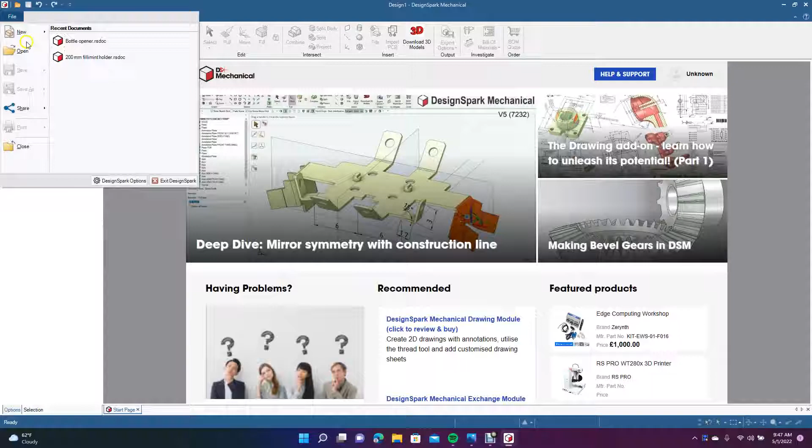Design. We're going to come back up to File, go down to DesignSpark Options, navigate over to Units. We want this to be in metric, so we'll go ahead and change that to metric. Then we're going to go ahead and change that to plan view. Okay, we're going to go ahead and create a line out here. So just click anywhere. We're going to drag down.

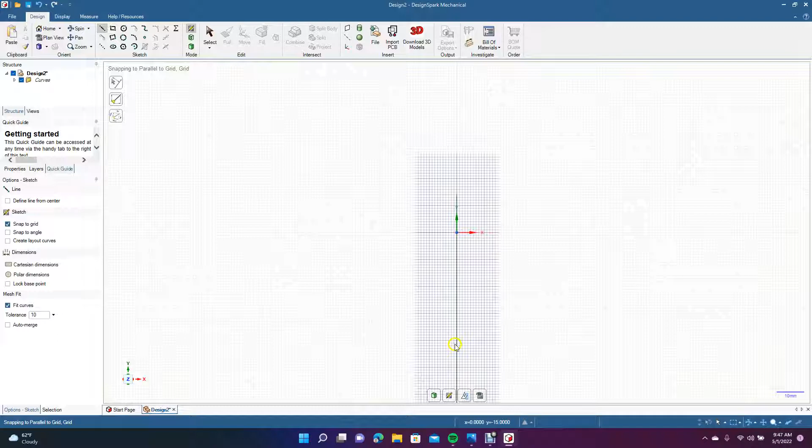We're going to type in 130 millimeters. That's how long the grip should be. Then we want the grip to be 33 millimeters. So we're going to offset this line 16.5. So we'll get our offset curve. We'll type in 16.5. Okay, and then we want to add some thickness to the grip, so we're going to go ahead and get our offset again, and then click on over and offset that, let's say 5 millimeters.

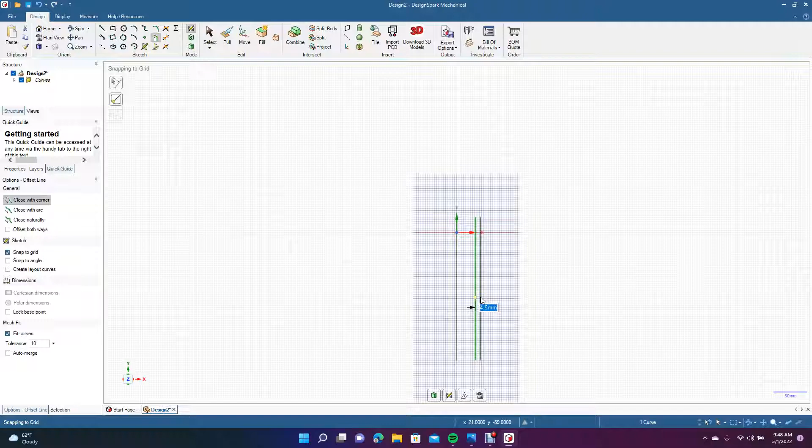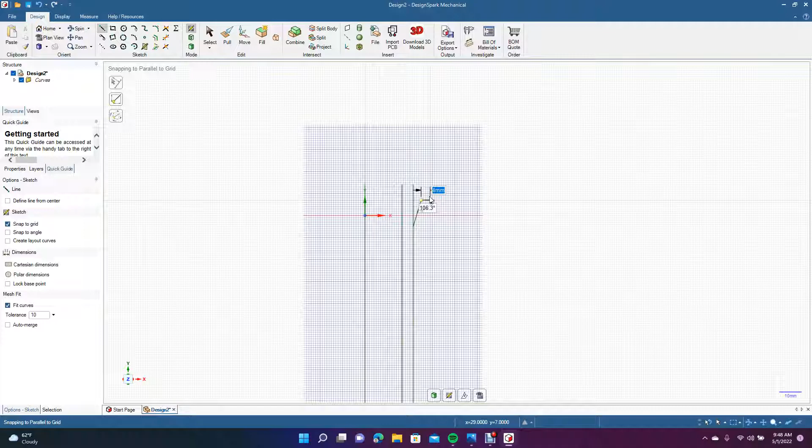Okay, let's Control plus to zoom in. Let's pan up. Okay, we're going to go ahead and get the line tool. We're going to put a little bit of a stopping point there for the grip. Okay. Let's go ahead and get the trim away tool. This is right there. Trim away that piece. Go ahead and up here to the create corner. We're going to extend that over. Now Control minus.

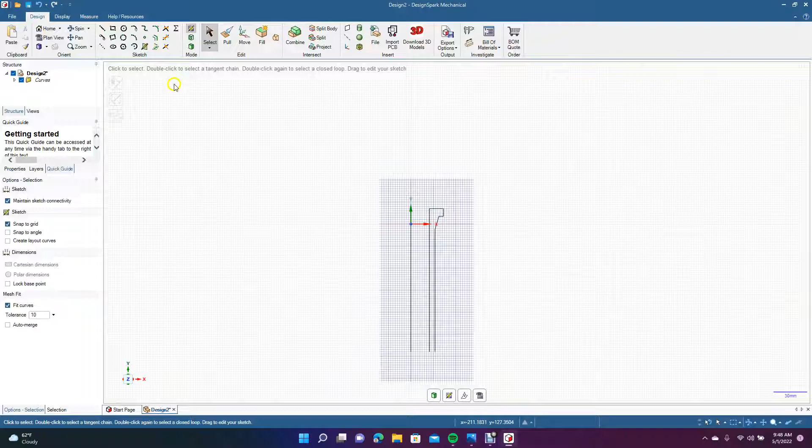We're going to do the same thing to the bottom. So let's go ahead and pan up. Just Control plus. Pan over to the right, grab our line tool. Similar situation here. Okay, let's get our trim away, which is right there, or T on the keyboard. Let's go up here to create corner.

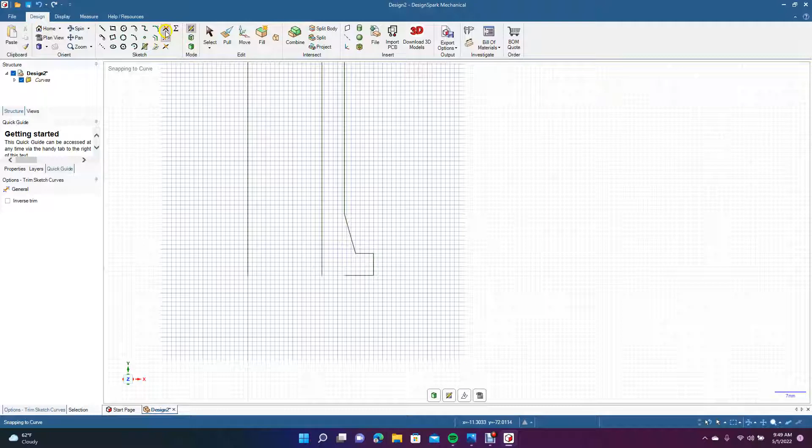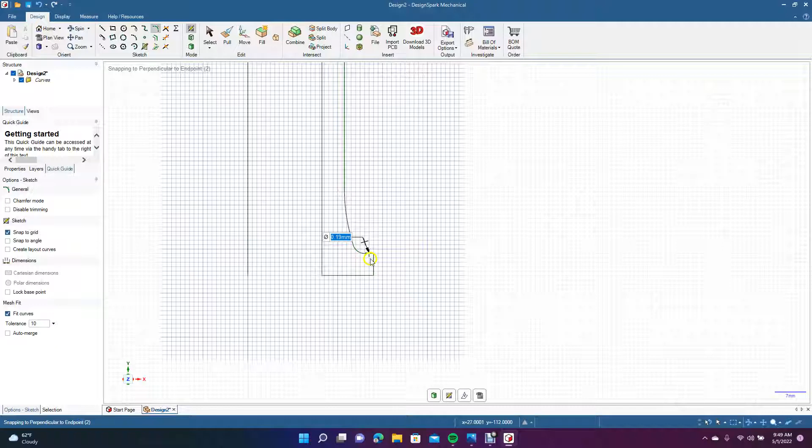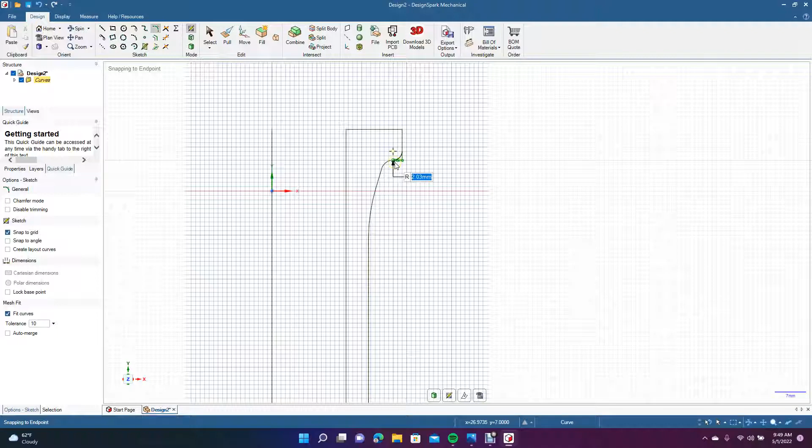Okay, let's put some fillets on this. So we're going to go ahead and create rounded corner, grab that tool. Let's go from here to here. Okay, let's pan this down. Let's do the same up top here. Let's click there. Click 2 spots there to round, and then 2 more spots here, from here to there. Okay. Now we're going to Control minus.

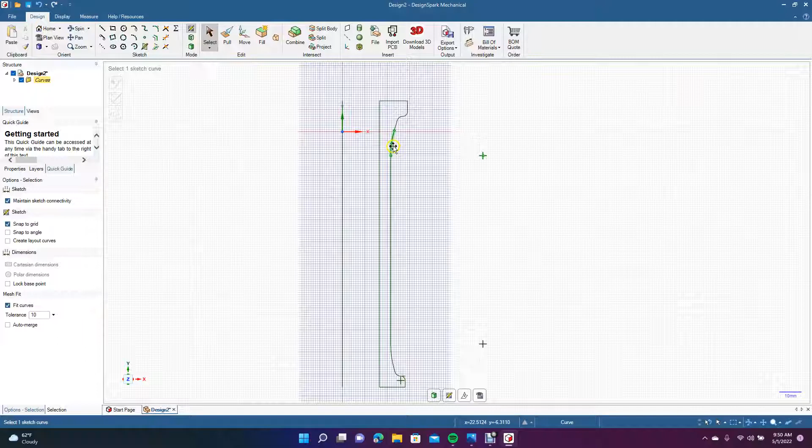I want to put a little bit of a rounded corner, a little bit of an arc in here. So we want this to give some padding for your hand. So we're going to go ahead and I'm going to get rid of these. Delete. I'm going to get the 3-point arc. I'm going to go from there to there. And I want to put a little bit of a kind of a bow in there. Okay.

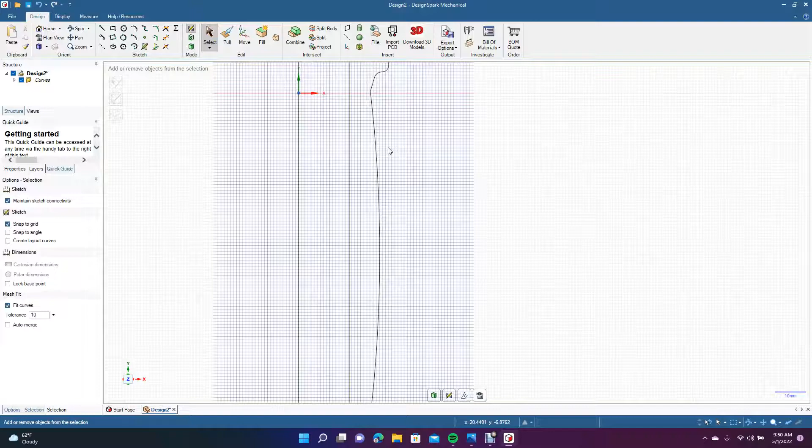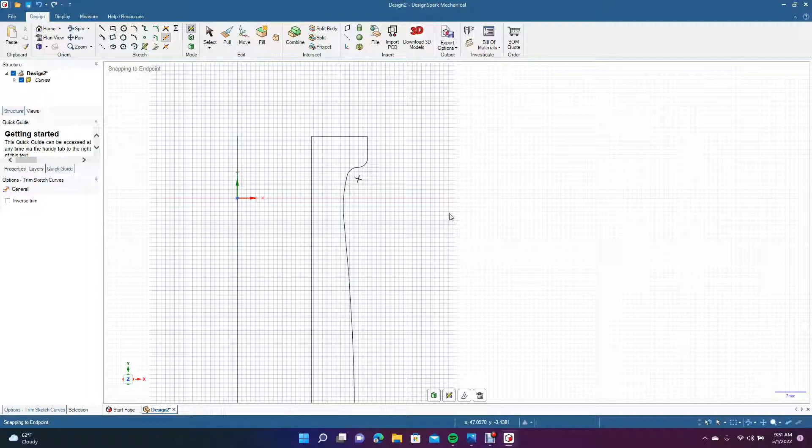Now we're going to go ahead and Control plus. Let's pan this down so we can see. Now we're going to do the fillet tool. Go from there to there. All right, let's get our trim away. Get rid of that little piece. Okay, doesn't look too bad. Now let's go ahead and pan up. We're going to do the same thing down here.

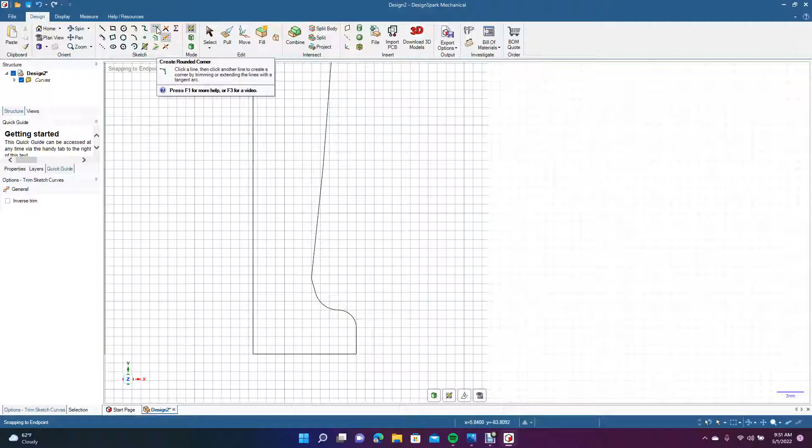Get the trim away tool. We're going to trim away these 2 little pieces. Let's zoom in because I see a piece down there, but I can't actually click on it. So go ahead and get the trim away right there. Now let's get our rounded corner, create rounded corner. We're going to do the same thing there, put a little corner in there. Okay, now Control minus. Let's go ahead and pan down on this.

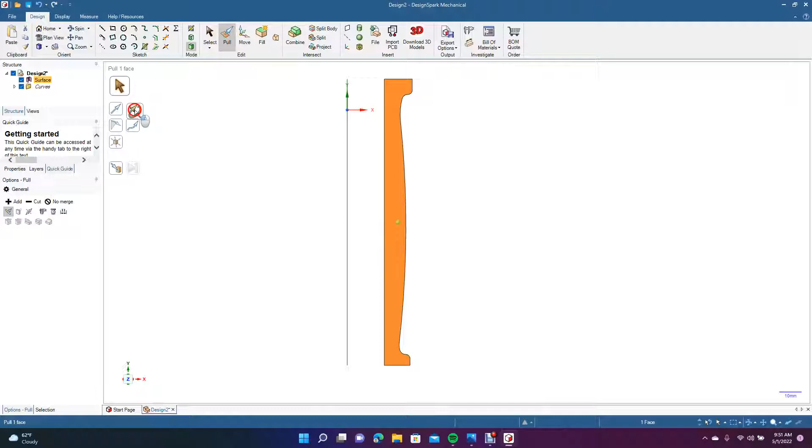Now we're going to go ahead and let's get our pull. We're going to click on the piece that we created. We're going to go to the revolve. We're going to select that midpoint, and then we're going to go full pull. All right, so now we're going to pan down.

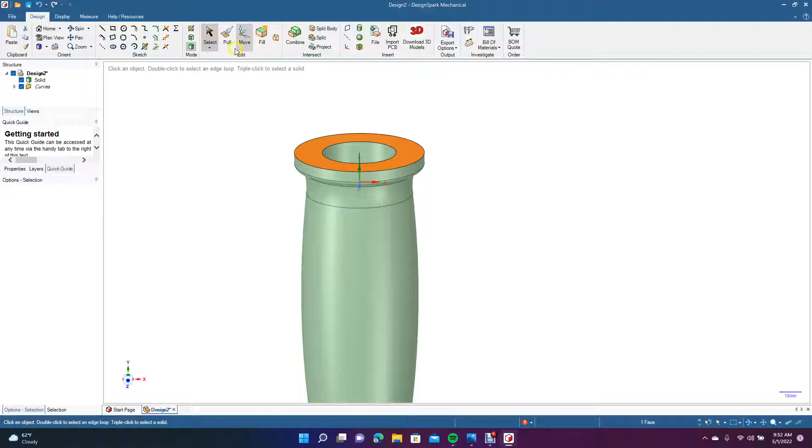Let's spin this. I'm going to add some more thickness to the end here, so we're going to grab that. Oh, let's go ahead and click off. Let's click that. Pull. Let's pull that up, type in 5 millimeters. Okay, let's pan. Let's do a little spin here. We're going to extend those 5 millimeters. So we'll click here, type 5.

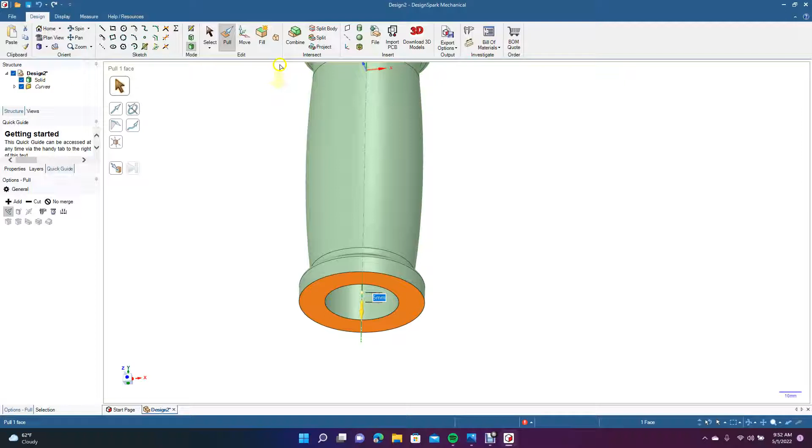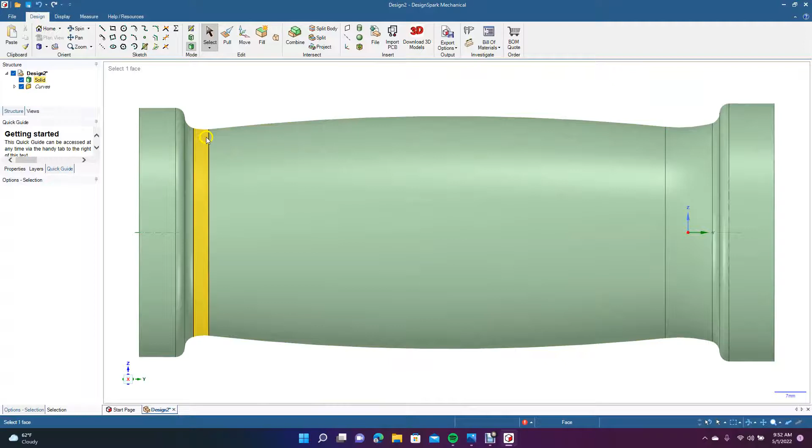Okay. This is pretty good. This is going to be our mountain bike grip. I'll go ahead and view this from the top. Let's view from the right. Since I added this little arc right here, this is going to be the squishy part of the grip, so I don't need to add any other knobs or anything for this particular grip. And we'll go ahead and spin that.

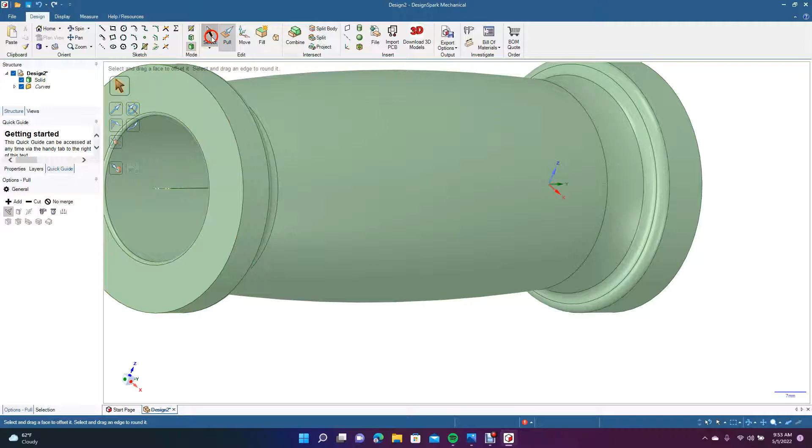I'm going to leave these end pieces here flat. I'm not going to put any kind of fillets or chamfers on them. What I am going to do is add a rounded fillet to here, just so it's easier to put this on. We'll do 0.74, and then we're going to spin this around, do the same on this side, pull, click there, type in 0.74, enter.

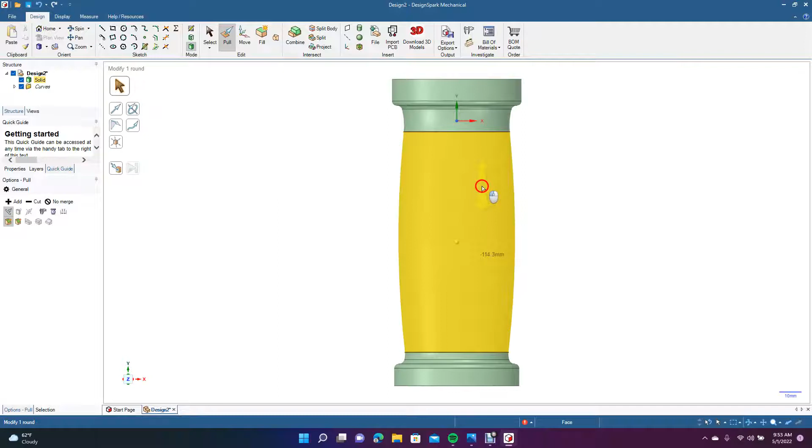Alright, that's going to be it right here. So we'll go ahead and go back to the top view. Pull. Okay, that's going to be our mountain bike grip. That's going to end today's tutorial.